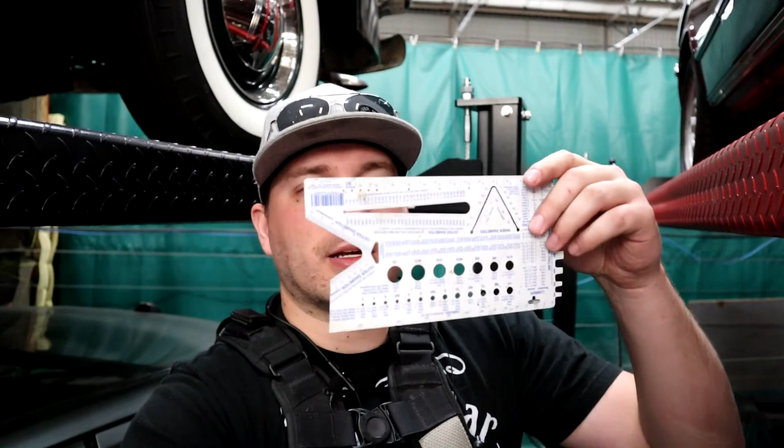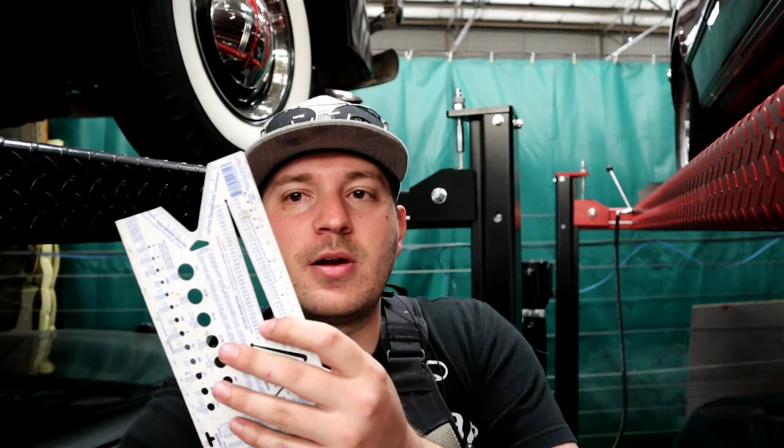I would normally do these measurements with a digital caliper setup or something like that, but mine is out of battery and I couldn't find the right ones. So instead we're gonna use this little gauge that has a bunch of different ways to test threads and fitting diameters and things, but we're going to use this wire and drill section here. What you do is put a wire or drill through this section and run it up until it contacts and stops, and that'll give you a size measurement for the OD, which is close enough for us here.

We're not looking for perfect precision fits. We just want to have an idea of how big to make all the holes in our thing. So I'm gonna go do that here real quick, and I'll see you guys back when I'm sitting down in CAD.

All right, everyone, we're back home, and now we're gonna take those measurements we took from the Chrysler and translate them into an actual usable plastic part.

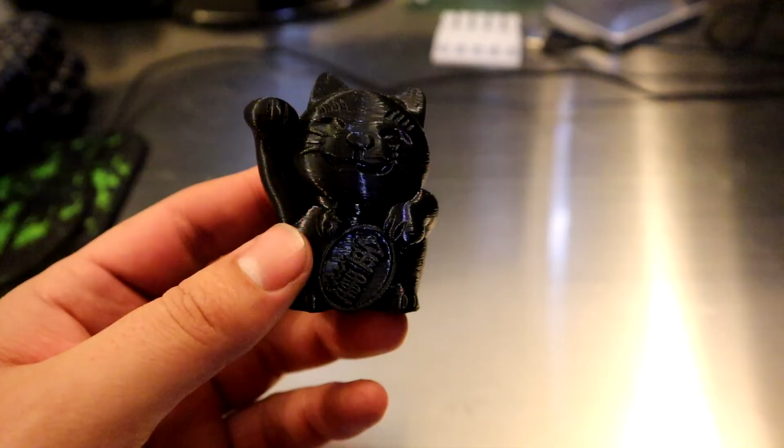This video is kind of intended to be a primer on how to go print your own parts for your car, and it's also intended to show you guys that cheap, affordable 3D printers, like this one I have back here, which is a Monoprice Select Mini V2 or something like that - it's like 180 bucks on Amazon - are not just for printing little toys. They can print actual useful things for you.

So kind of what we're going to do here is I have my computer open, got my CAD program set up, so I'm going to go in and do some CAD work, get our pull tab design finalized here, and then I'm going to show you guys the program I use for translating your CAD parts to something your 3D printer can understand and use. It's G-code, if you guys are familiar with CNC work. And then we're actually going to go print it on this printer back here, throw it together, put it on the car, and go about our day. So let's jump into CAD.

Okay, everyone, we're in our CAD environment now. I'm using SolidWorks, which is a full professional CAD program, a solid modeling program. It is quite expensive, and I would not suggest that to pretty much anyone just starting out with CAD. If you have CAD experience, or if you learned on a certain program, absolutely go get it. But this version of the program I have is about $9,000, and even the cheapest ones, I think when I was looking at it, was about $3 or $4 grand.

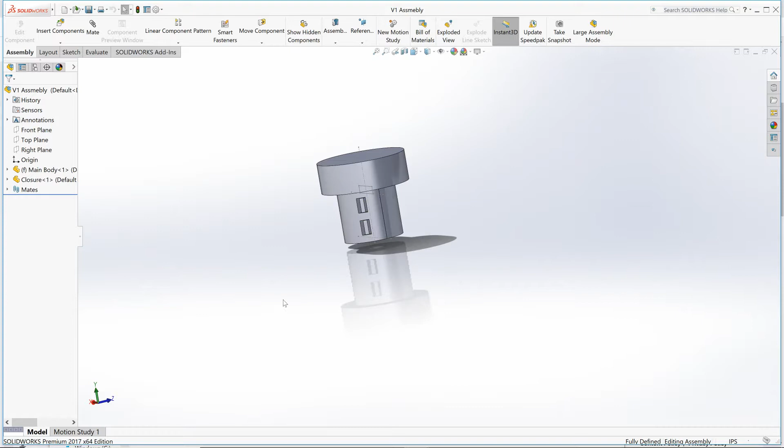CAD programs are a lot cheaper, and there are even some decent free CAD programs out there for those of you who want to draw up your own parts. If you're curious about what they are, let me know in the comment section and I can give you guys some feedback on what I think looks good and what doesn't. This is the program I used in school, and it's kind of the one I've stuck with in my own personal use.

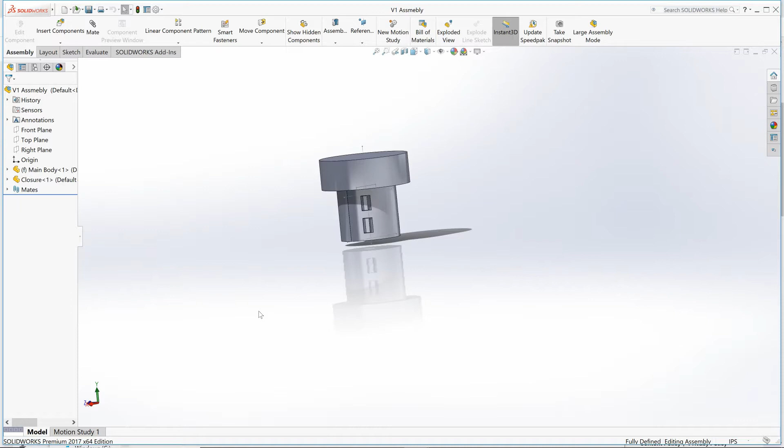I do want to stress that in order to 3D print car parts, you do not need a CAD program of any style. However, if you don't have the ability to create your own parts, you have to go find someone else's part files to send to your 3D printer. There are good websites like Thingiverse where people put up free or low-cost files, so you can get those elsewhere. If you have a friend with a CAD program, they can CAD it up and send it to you—you don't have to do it on your own. But if you're going to create custom pieces, you're pretty much going to need a CAD program.

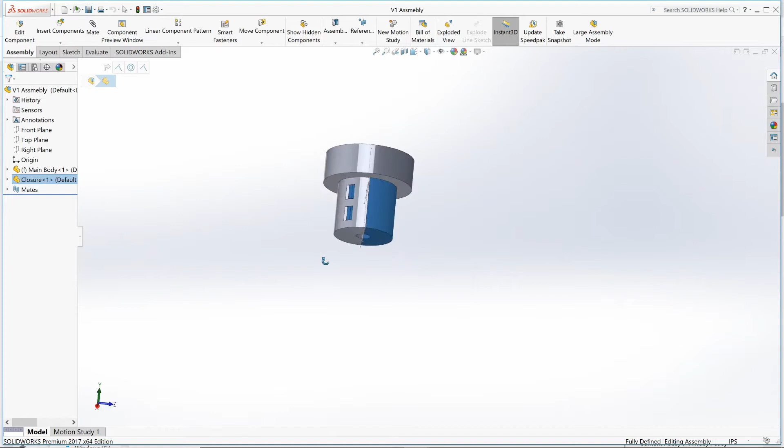So here's this assembly. It comes in two pieces: a main body, where most of the holding and pulling will happen—you can see it highlighted in blue right now—and a closure piece that inserts into the main body in these grooves and seals everything off. I'm going to show you what's going on inside before we do a little bit of CAD work to check the fit.

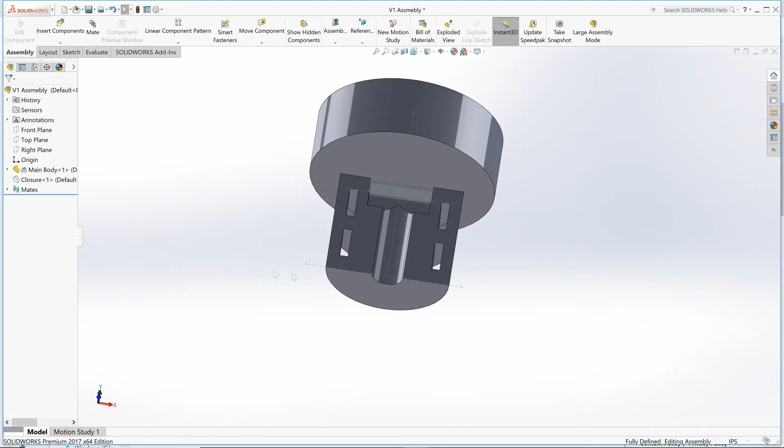So I'm going to hide this closure piece and show you what's going on in here. This is the inside of our main body. We have a little T-shaped section here—the idea is the head of our hood release pull will sit in here, and the main line going out towards the hood release mechanism will run out here and show up down there eventually. When you want to pull the hood, you pull up on this face, and that'll let you grip a lot better than trying to just grab this wire between your fingers.

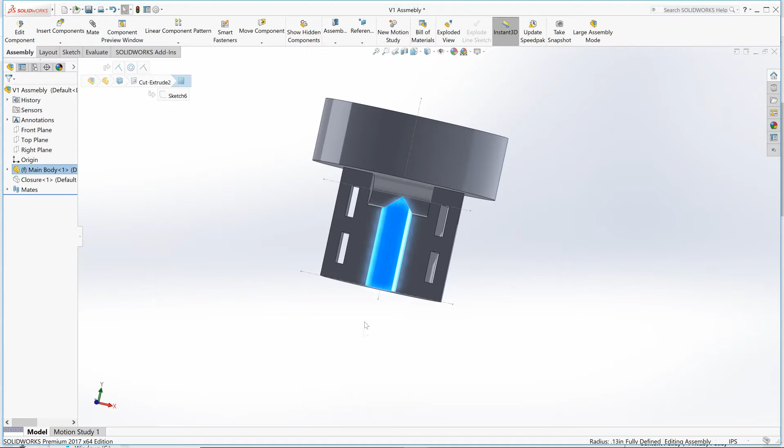So I think this is pretty close. This hole probably needs to get a little bit smaller—it's currently quite large. What I wanted to do is sketch up our hood release wire mechanism real quick and throw it in here to make sure everything else looks good.

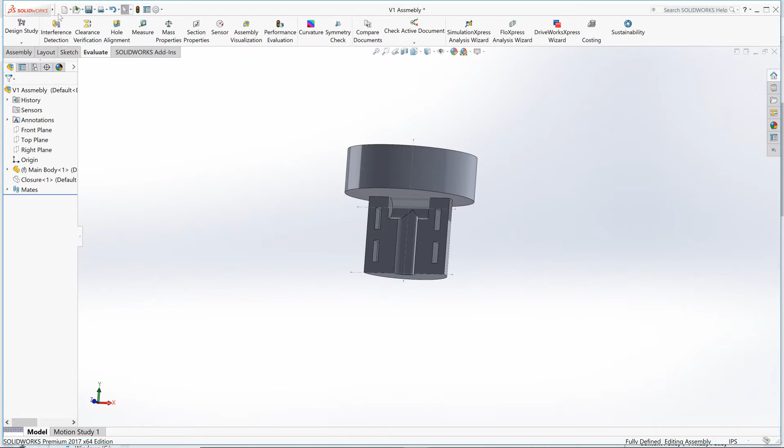So we're back in our V1 assembly, and I've got the closure hidden so I can mate things up here and do our test. This is a really important part of design—sketching up the other things around it to see if you have interferences or not. We're going to insert a component here, the release wire, which we're going to cheat a little bit on—you'll see how we do that in a second. But first we go into mates, which is how you line everything up in an assembly so it all works.

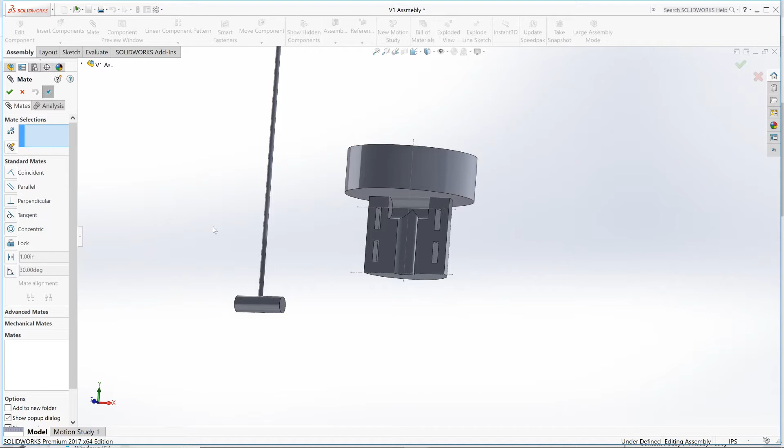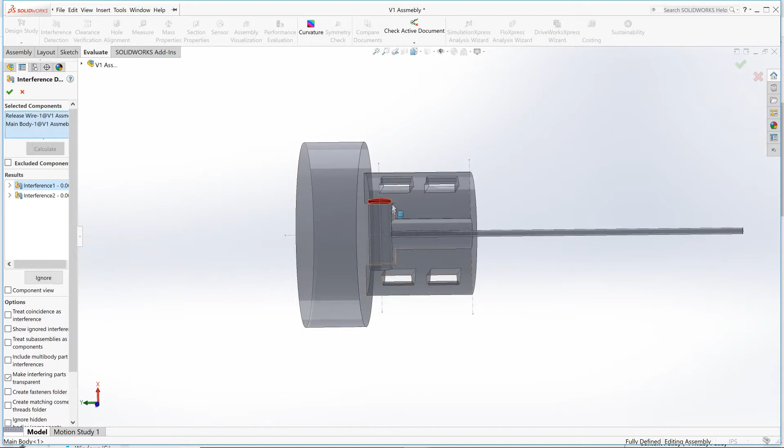When we're in here, you can see this piece is already intruding in here—that's somewhat intentional. It's not that big, but we run interference detection between that piece and this piece. Calculate, and it'll show you—most CAD programs worth using will show you this—the areas where they're interfering and how much. So there's interference 1 and interference 2.

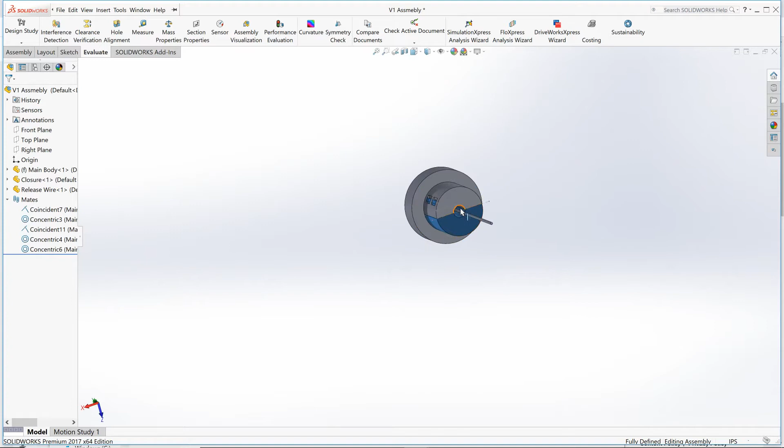It's going to be the same on each side based on how we mated these things together. So this is kind of what we're looking at in the end before I make some modifications here. This is way too large—you can see this head will just flop around all over the place, so that needs to go away. And I made the head of this release wire a little too long, a little too wide.

So that's not actually realistic of what we're going to see when we get there. But I wanted to show you guys a little bit of what we're looking at if we do some interference work. So I'm going to go make some adjustments to these couple parts here, and then I'll see you guys back when we're in the ideaMaker software.

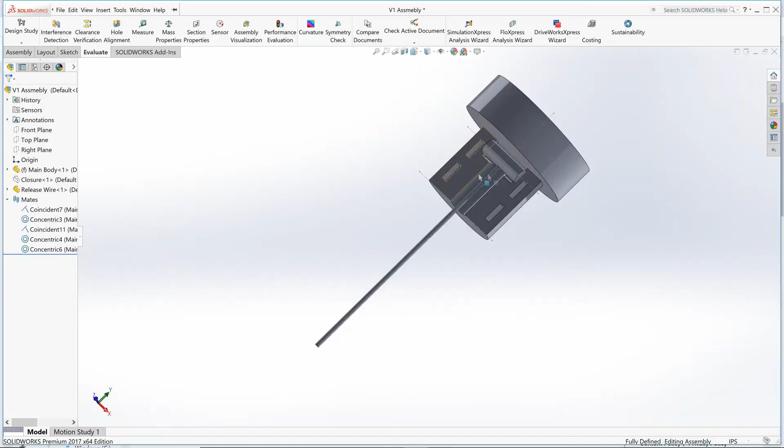Okay, everyone, we're in our slicing program. This one's called ideaMaker. It's put out by a company called Raise 3D. They make some really good products. I really like this slicer, and I'm in the process of trying to get one of their really good 3D printers.

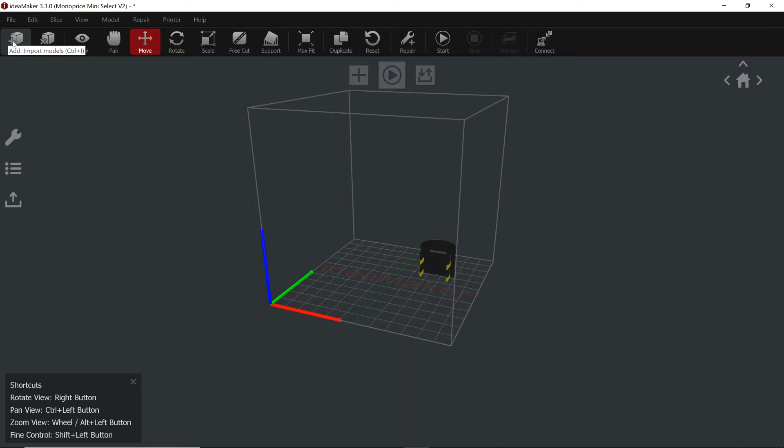So I'm going to just give you a quick overview of how to go put stuff into your slicer here, get it set up. There's a lot more detailed guides, and in the future I'm going to do a series on an introduction to 3D printing. This is more of a primer. But essentially you're going to find your slicer, whatever it is. This is a specialty one, but there's stuff out there like Cura and Simplify 3D and stuff like that to do a similar thing.

So you're going to go in here, you're going to add V2, which is what we're working with here. Add a part, and it's going to show up in here, and it's going to ask, hey, which extruder? The printer I'm using only has one extruder, which means it only has one head that prints. Primary extruder, yeah, that's all correct.

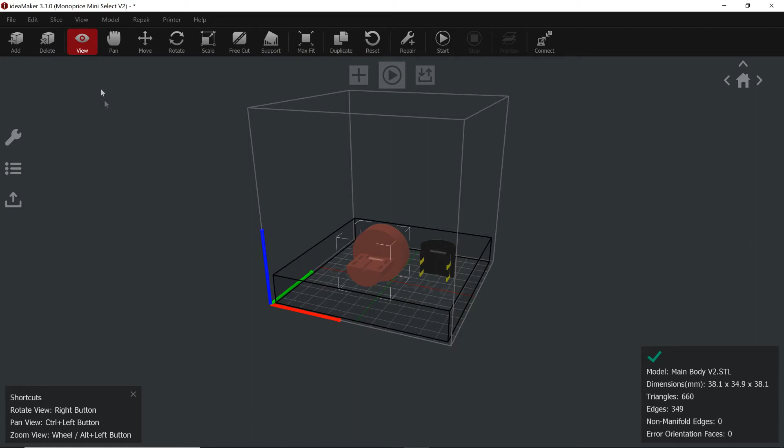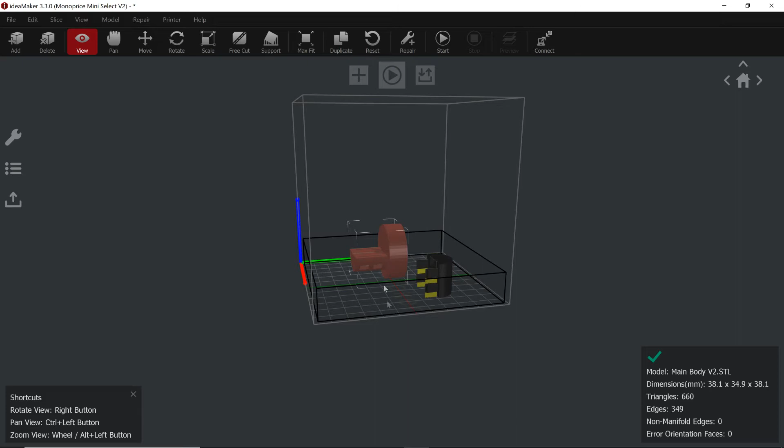First thing you'll note is it comes in looking like this. Some things about 3D printers: they're essentially like a little hot glue gun sitting there melting plastic down in layers. So they can do a lot of cool things, but what they can't do is print 90-degree overhangs. If we look at the bottom of this thing, you see where this plastic here is just hanging out in the middle of nowhere. If we tried to print it in this orientation, it would be terrible without any help. I'll go over that in a bit on our other model. But without any help, it'd print many layers up this way, and then go to make this first print, and liquid plastic would just dribble all out over the place and be horrible.

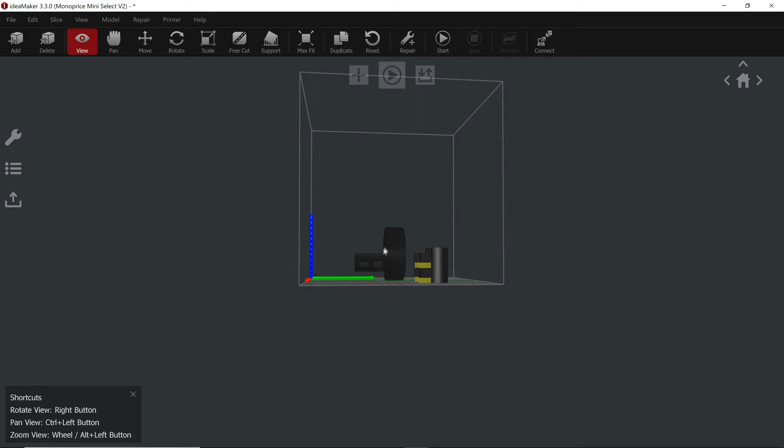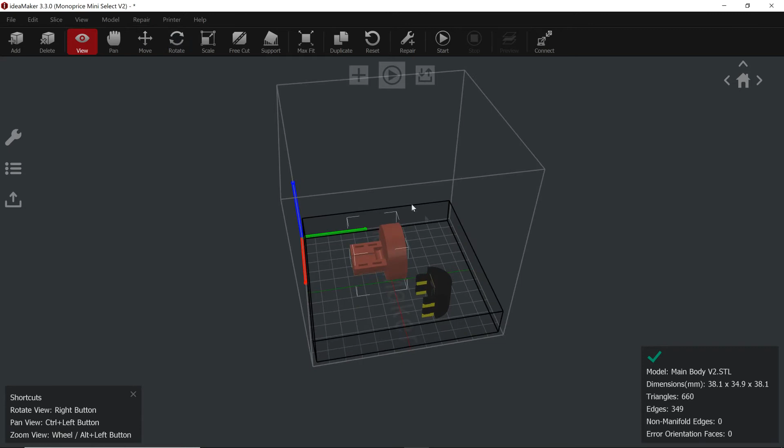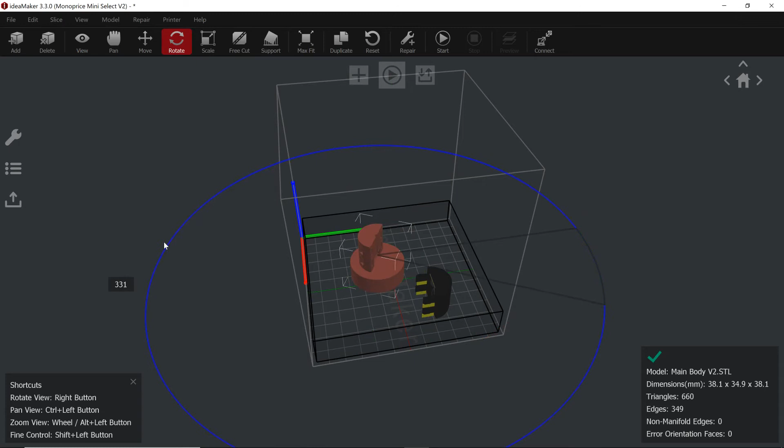So what we want to do with this piece is rotate it so it doesn't have this giant overhang, or we can add support material. This one we want to rotate because I'm curious to see how well my printer will print these notches without any support material inside of them. To rotate it, it's quite easy. You just select the piece — this will change based on your printer — but you look at the circles and figure out which one you want it to rotate on. So it's the red circle, the x-axis, we want it to rotate on at 90 degrees. Nope, not that direction — that direction. We want it to sit on its head there. So that looks good to us. We can even spin it around if you want, but I don't care so much about that.

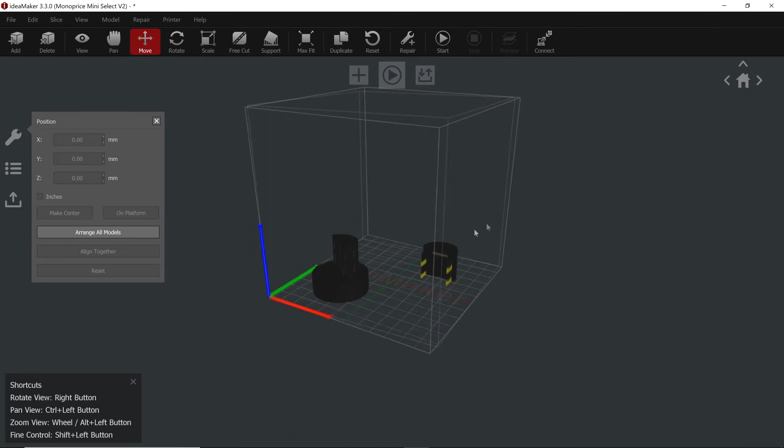And then we're going to want to move it. It could print right there, but if something goes horribly wrong, I kind of want to move it a little bit, so move this thing back over into this corner. Now we're going to print our two pieces away from each other — our main body here and our closure body here. You'll notice that these have the slots in the vertical orientation.

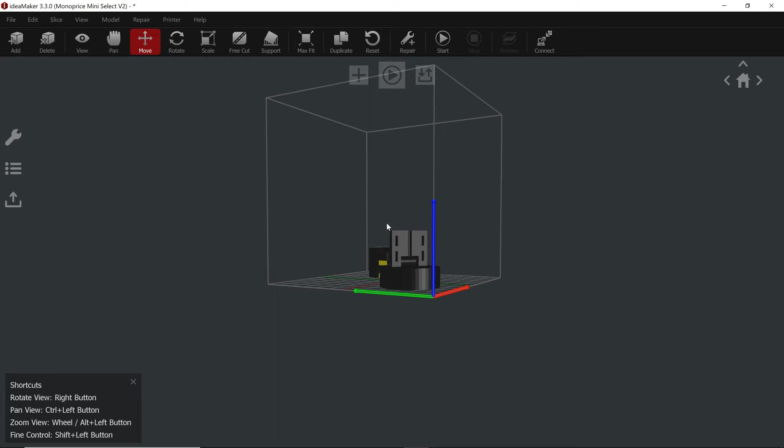See these slots? 3D printers can bridge small gaps decently well. The hope is that this gap won't be too bad. My friend on a different printer didn't have any trouble bridging that gap without support material, so we're going to see how well this printer does with these settings. I'm sure we're going to fail a couple times here.

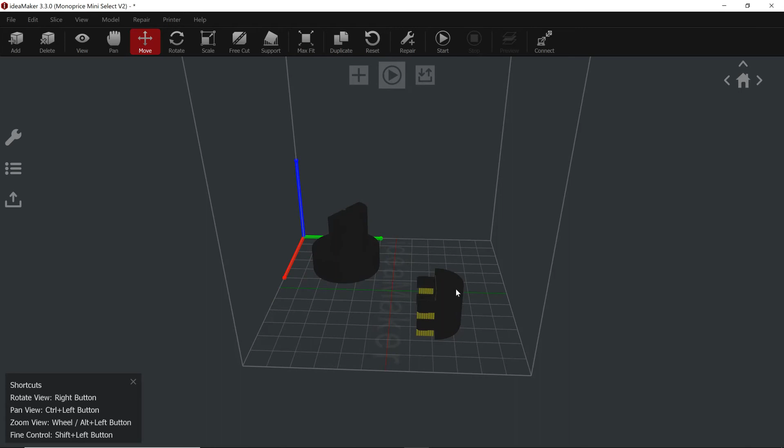So that's how you set it up. Some parts you can't set up well without needing support material. This closure part is one of those - you'll notice it has these tabs. These are in the current printing orientation, which is what I'm going to try. These tabs have 90-degree overhangs, and they would droop just like this one would have if we'd left its orientation as it came in.

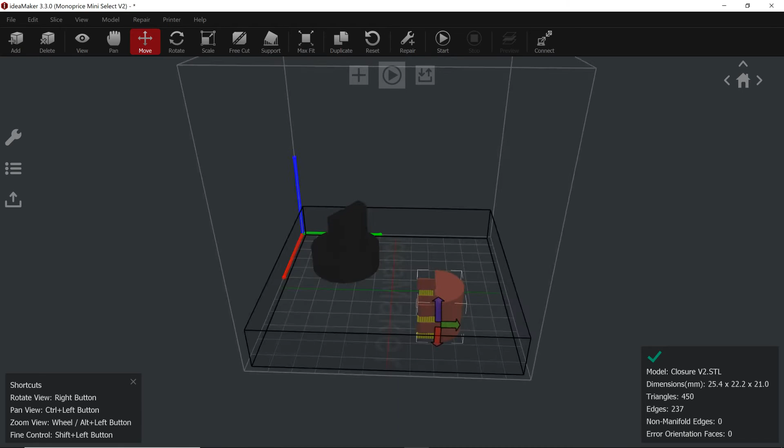Problem is, these tabs also have little shoulders over here to lock in place on this piece. So if I were to print it on its back, those shoulders would also droop and give us really bad fitment issues and everything else. So I'm going to try and print it like this.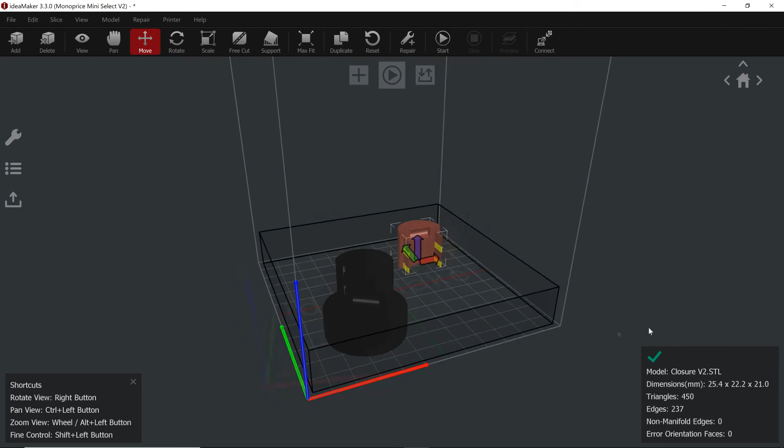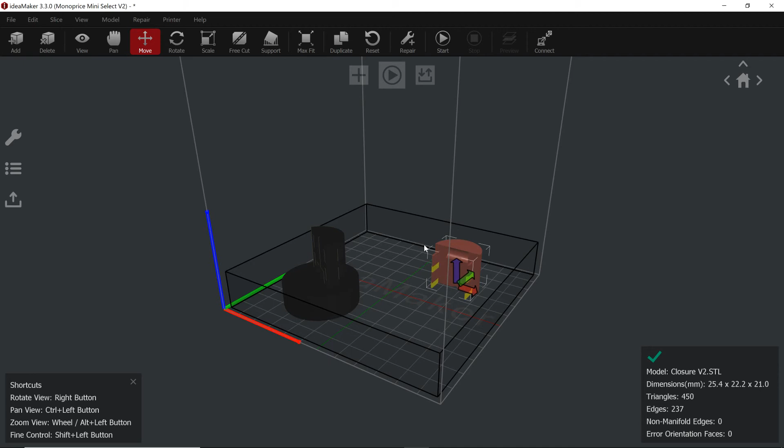In order to do that, I have to add support material, or supports. This program has an automatic section where you can just add supports, and I did that for this, and got their size down to something reasonable. What I did have to do, though, is remove the automatic supports that tried to support in this groove area, which doesn't really need them. Because the support used the same material as the rest of it, it would have essentially filled in that area, so I clicked out all of that support material.

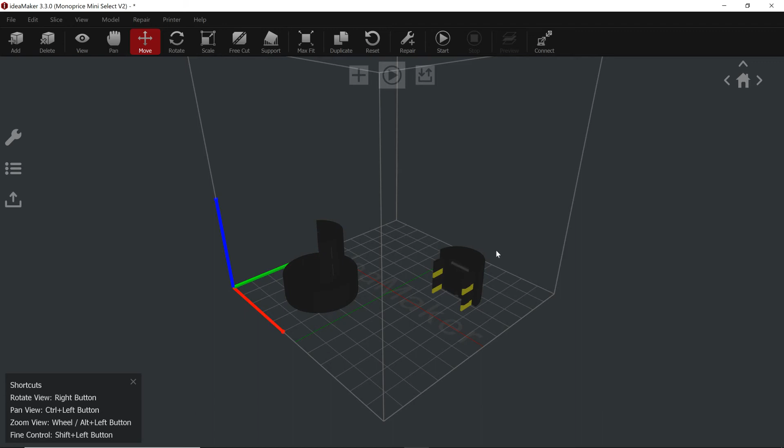So this should be pretty good right now. What we're going to do is go up here and slice this thing, put it on an SD card, and get our printer ready to go. I'll show you guys some time lapse of the printer running and doing everything it needs to do.

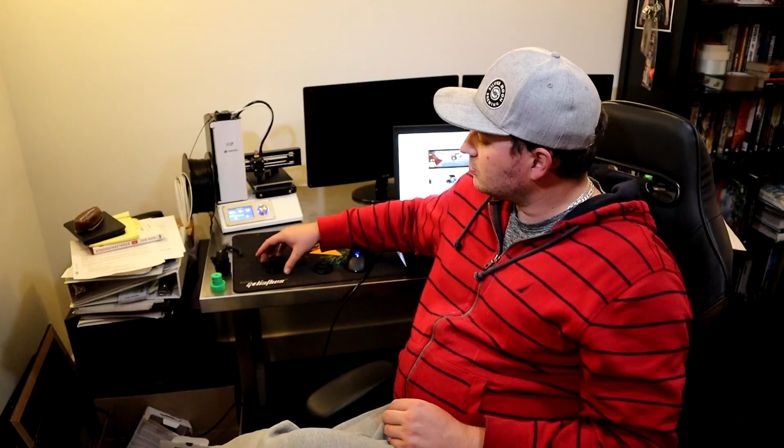And we have everything off the printer. So we got our couple parts, cleaned them up. They fit together nice and snug, so I think everything will work out fine. There were some imperfections - you guys probably saw some stringing during the time lapse. That has to do with the settings I'm running in my slicer for this printer. They're not optimized yet. I just wanted to get here, get printing, and get some pieces off so I could make some progress on the build.

So I'm running some more calibration models behind me, trying to figure out what settings I need. And that's pretty much it for this episode of Make It and Break It on our Project Ute 300C.

Next episode on the 300C, we're going to go fit this pull tab dealio and make sure it works. We're going to check our check engine lights, see if we can't fix those. We're going to fix our airbag lights and our front bumper covers, try and get her in pristine condition for inspection, and get the inspection done at some point.